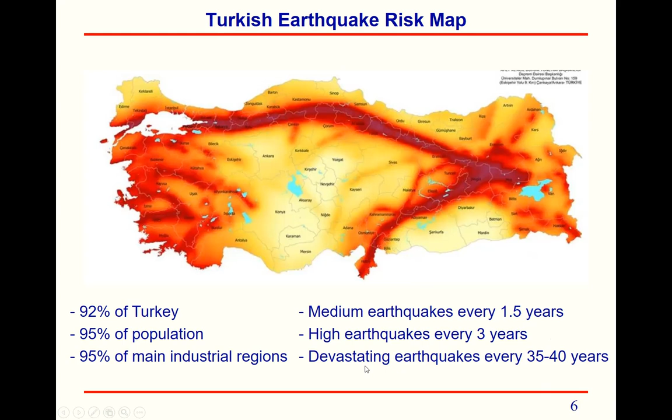Due to those fault lines, we have an earthquake risk map in Turkey. The darker colored locations are the more earthquake-affected regions, and the lighter, yellow colored locations are less affected. Actually, 92% of Turkey, 95% of our population, and 95% of our main industrial regions are in the earthquake affected zone. Every 1.5 years we have a medium earthquake, every 3 years a high earthquake, and every 35 to 40 years a devastating earthquake. This was a really devastating earthquake.

Let's talk about earthquake activity in the region. This region is very active, and we know the fault lines in the region. In that region, we've had historical earthquakes also, starting from the dawn of mankind - around 500, 600, 1343, 1114, 1544. We have many earthquakes, so this zone is really active in terms of earthquakes.

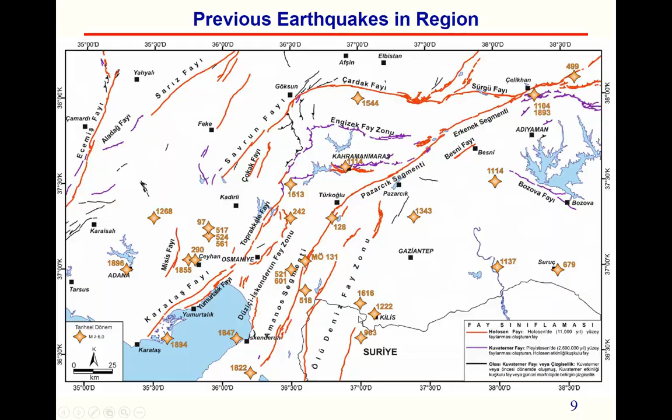Our earthquake, the last one which happened on 6th of February, was actually two earthquakes back to back. The first one happened here, which we call the Pazarcık earthquake, and the second happened here, which we call the Elbistan earthquake. The first one's moment magnitude was 7.7, and the second one's moment magnitude was 7.6. These are the cities adversely affected by the earthquake.

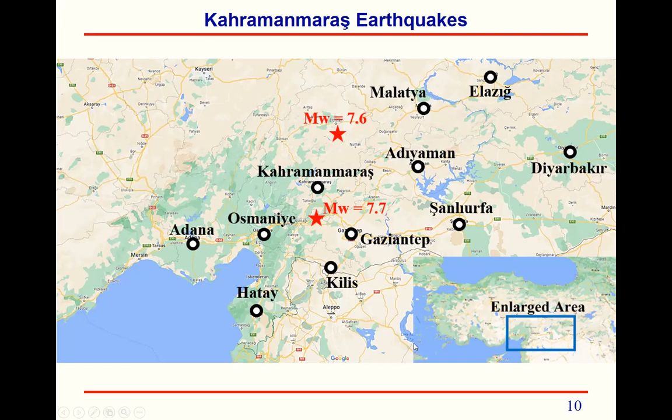In Turkey, there are two locations which calculate the magnitude of earthquakes. The first earthquake happened at 4:17 a.m., just before morning, with a magnitude close to 7.7. Other locations measured it a little higher, but we can call it 7.7, and it happened in the Pazarcık region in Kahramanmaraş. The second earthquake happened at 13:24 in the afternoon, the same day, with a magnitude of 7.6 - we call it the 7.6 Elbistan earthquake.

We had different focal depths measured by different locations, but the first earthquake's magnitude was 7.7, and the second earthquake's magnitude was 7.6, both happening the same day, very close to each other in time.

I will show you a video of the earthquake, what happened during it.

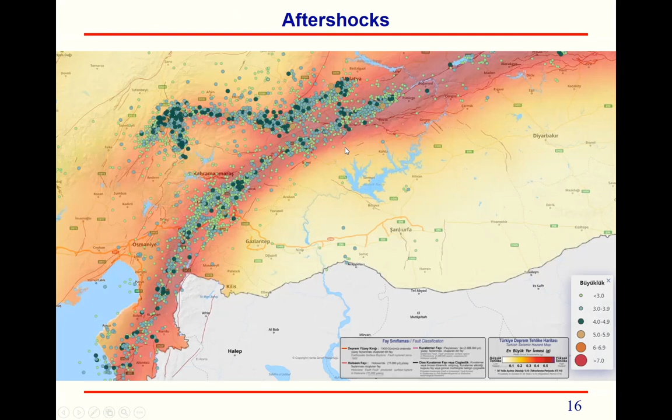After the earthquake, we had many aftershocks. You can see the locations of the aftershocks and their magnitudes. What are the magnitudes of them?

As I told you, the earthquakes happened at 4:17 and 13:24 in the afternoon, the same day, magnitude 7.7 and 7.6, and it affected these 11 cities: Adana, Osmaniye, Hatay, Kilis, Gaziantep, Şanlıurfa, Kahramanmaraş, Adıyaman, Diyarbakır, Elazığ, and Malatya.

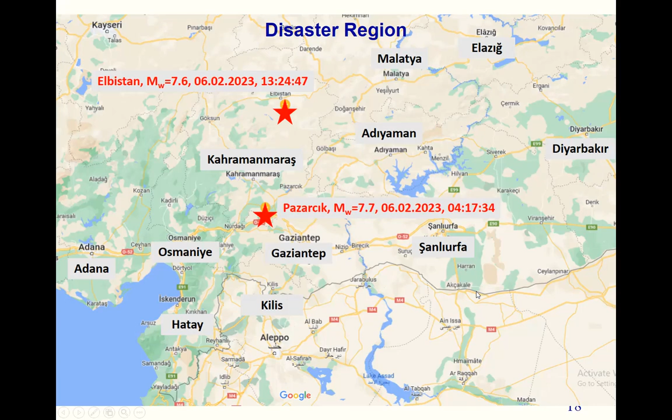We had collapses in these cities. To sum up how much collapse we had: in Hatay, 65,000 buildings were severely damaged or collapsed, so Hatay actually saw the highest devastation.

Then we had Kahramanmaraş, close to 49,000 buildings damaged. Malatya and Adıyaman were the other cities affected a lot: 31,000 buildings in Malatya and 28,000 buildings in Adıyaman.

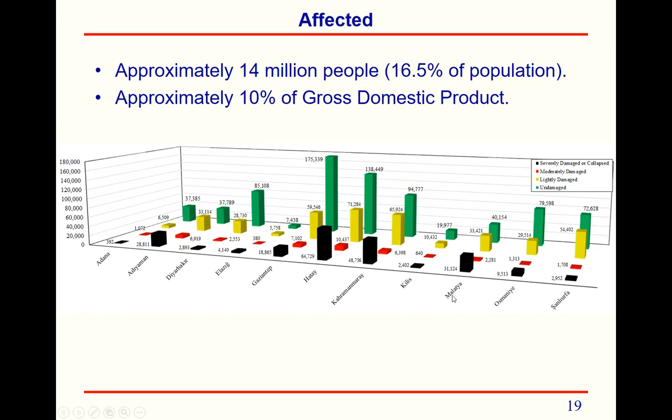But in the Malatya region, we didn't have a lot of life loss, because Malatya was affected more in the second earthquake, when the buildings were already deserted.

And I'm going to talk about our site investigation. After the first earthquake, which happened in the morning at 4:17, I'm living in Ankara, and we arranged a vehicle, and with that vehicle, we directly started going to the earthquake affected regions.

First, we went to Adana, and we were in the earthquake region 18 hours after the first earthquake. Then we stayed in this region for 5 days.

After 5 days, what we've seen: we went first to Adana, İskenderun, Antakya, then Kahramanmaraş, Pazarcık, where the first earthquake's epicenter is located, and then Adıyaman, Besni, Gaziantep, Nurdağı, Osmaniye. We saw many buildings in all of these locations.

We went there 18 hours after the earthquake, and stayed for 5 days. I'm going to show you the before and after the earthquake photos.

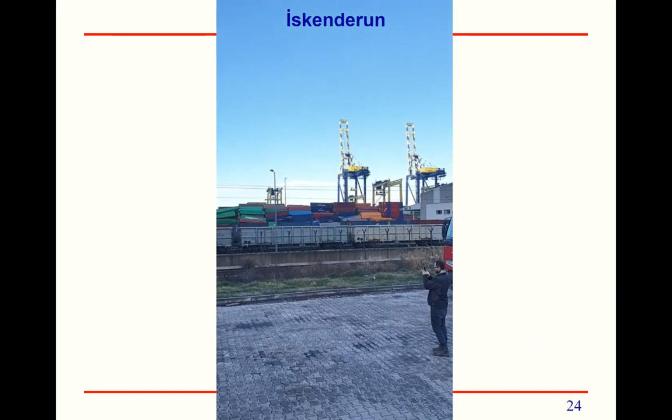Then we went to İskenderun after Adana, and in İskenderun the city center was actually in a very bad condition. Let me show that to you.

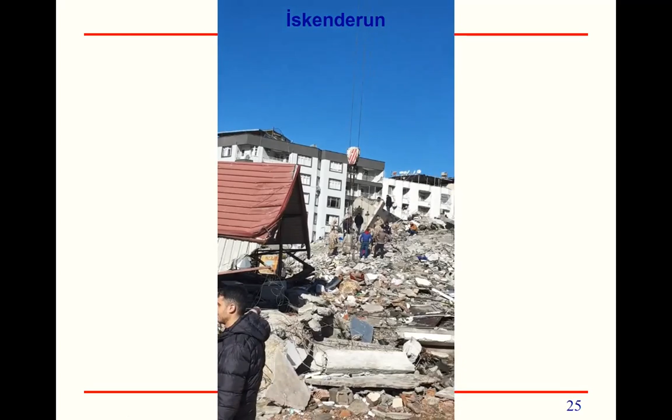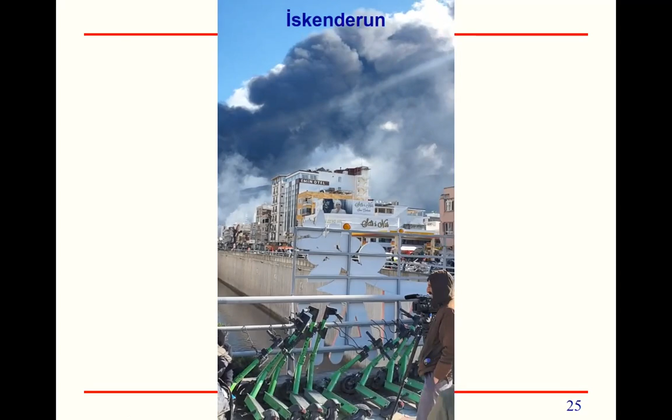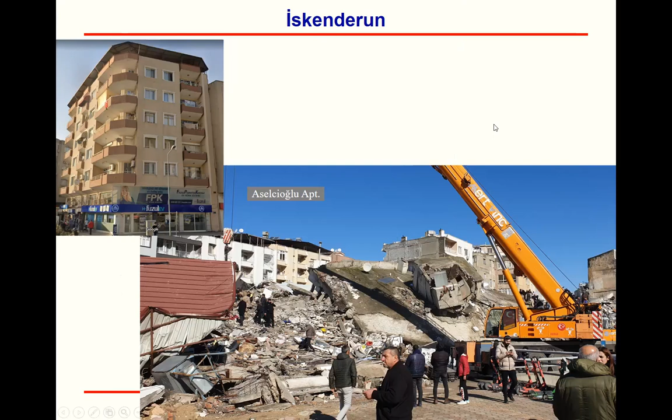After İskenderun, I can show some photos from İskenderun, before and after the earthquake. Aselcioğlu apartment, another apartment, before the earthquake and after the earthquake.

Then we went to Antakya. Antakya and İskenderun are both in Hatay city, and Hatay had the highest level of damage throughout all of these cities. It was really, really bad.

I can show you some before and after the earthquake photos. There was a very important structure I can call the Renaissance residence.

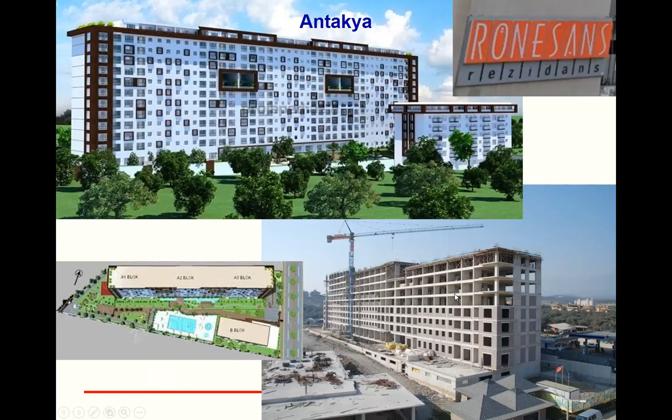In this Renaissance residence, we had 3 blocks constructed side by side, as you can see here, and there was another block, Block B, constructed a little far away from the first A1, A2, A3 blocks.

What happened is shown in the before-the-earthquake pictures and the after-the-earthquake pictures. It actually turned over towards the front side, towards Block B.

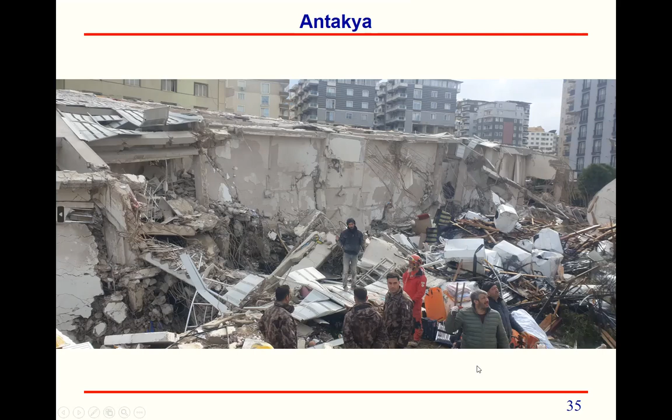We were here on the second day. There was a fire in the building, and you can see some pictures of these buildings - the Renaissance residence.

And then after Hatay, Antakya and Iskenderun, we went to Kahramanmaraş. On our way there, we saw a fault line which passed through the railroad and actually damaged the railroad like this.

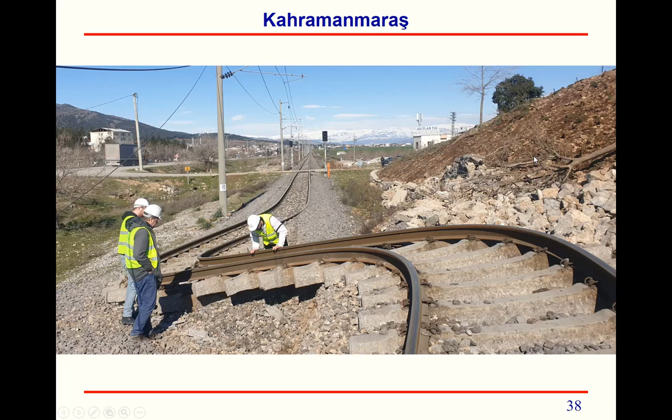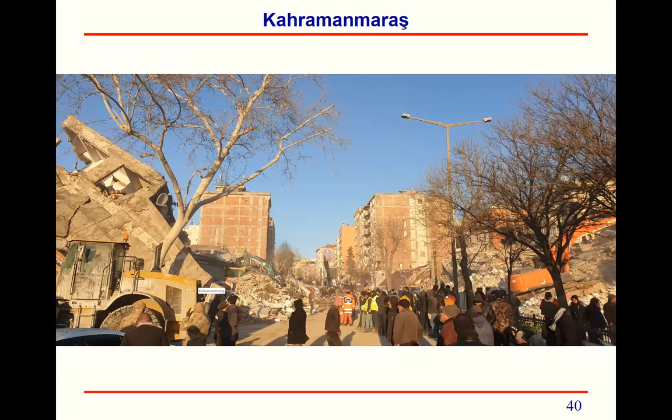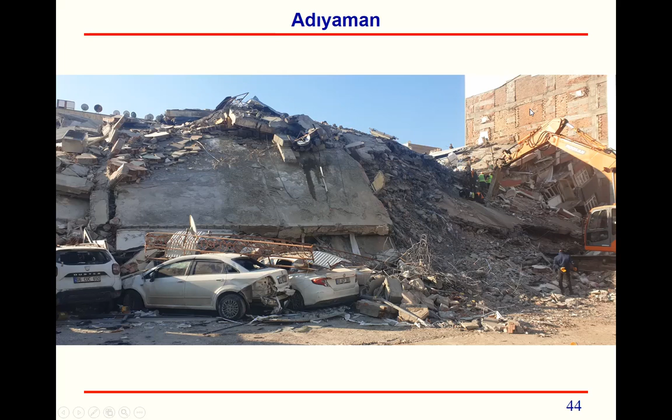And then we've been to Adıyaman. This is the Turkish Telecommunications Center in Adıyaman, this is after the earthquake. And here's another picture from Adıyaman.

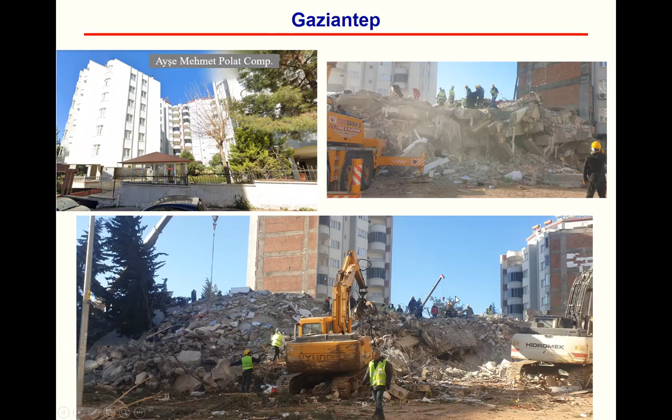And then we've been to Gaziantep. There wasn't a lot of damage there, but this building complex had 3 or 4 buildings collapse.

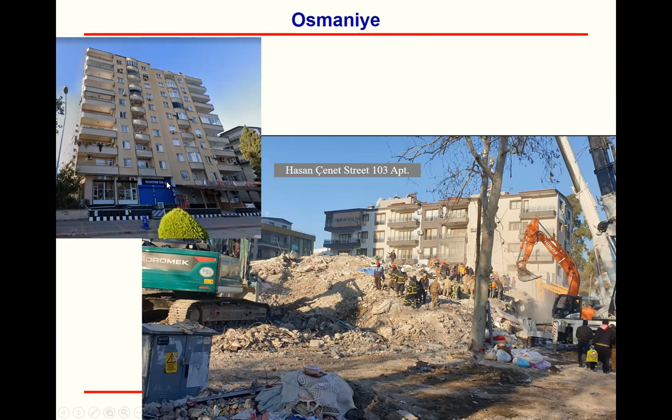And then we've been to Osmaniye. This was the last location that we've been to. It was before and after the earthquake, that's what we see. Right now you have seen some general view of the sites.

And then what I will explain is why all this happened, why there was that much damage. I'm going to explain this in light of Turkish earthquake specifications, okay?

The first earthquake specification in Turkey was published in 1940, and then we had many updates. But it's important to underline the last four: the 1975, 1998, 2007, and 2018 specifications. Why am I emphasizing the 1975 specification? Because more than 90% of the buildings that collapsed in this earthquake were constructed after 1975. You need to know 1975 because they should have been constructed based on this specification.

Our last Turkish earthquake specification, the 2018 Turkish building earthquake specification, aims for this: in a low intensity earthquake, we expect no damage if you design based on our specifications. In a medium intensity earthquake, there should be some damage, but it should be repairable. And in a high intensity earthquake, we need to prevent collapse. This is what we aim for in our specifications.

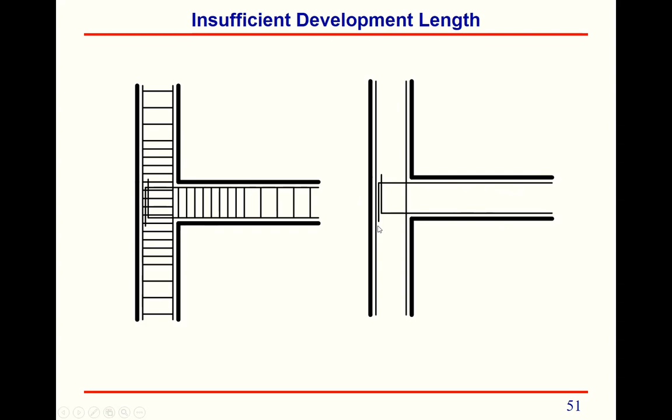If I take the stirrups out of view, I see this. Normally, the beam's longitudinal reinforcement, top and bottom reinforcement, shall be placed into the column and bent in the column so that it will not pull out from the column. This is what we have in our specification.

And if we satisfy this criteria, when the earthquake comes to the building and the building moves, there will be no separation between the columns and beams, because those joints will actually move together.

But there's a wrong application of this, where the top and bottom reinforcement of the beams are actually not bent in the column. They just extend into the column a little and then stop. This is the wrong application.

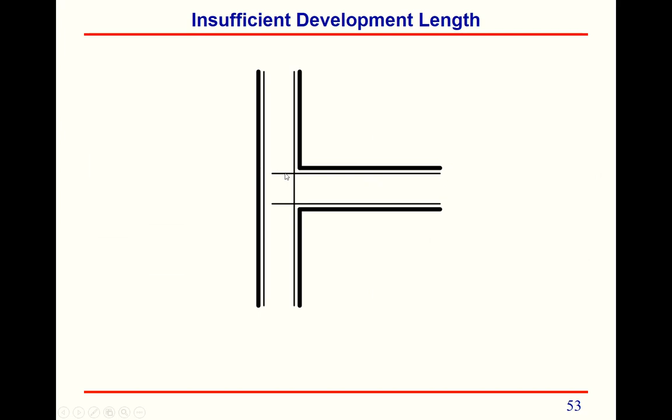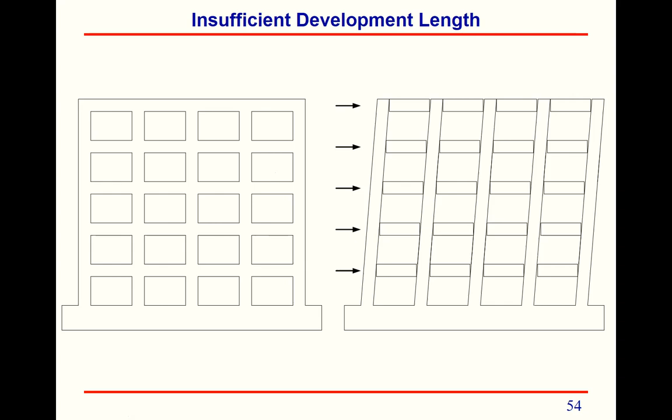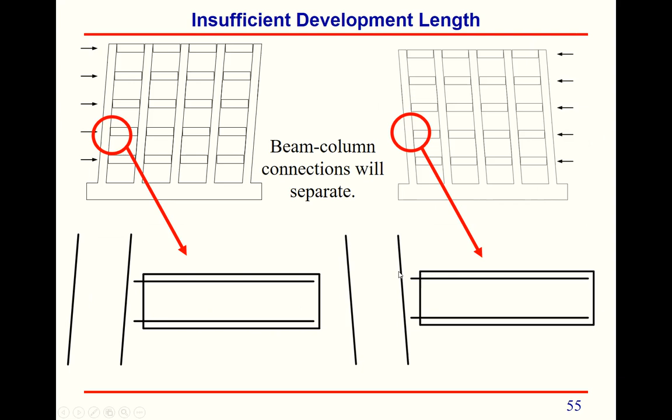And if we have this wrong application, what happens is that when the earthquake load comes to your building, the beams and columns will get separated like this. When it comes from here, the bottom side will get separated. When it comes from the right-hand side, the top side will get separated, and the integrity will be lost.

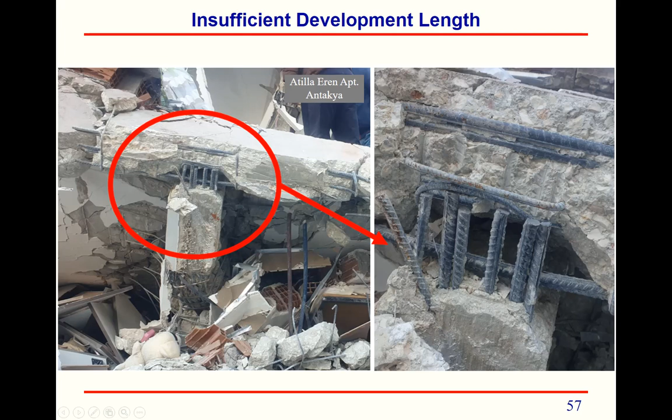Also, another one, this is the same apartment. Also, the bottom reinforcement just ends. There is no bending of longitudinal bars at the joints. This is a very big problem because when the earthquake comes, the integrity will be lost.

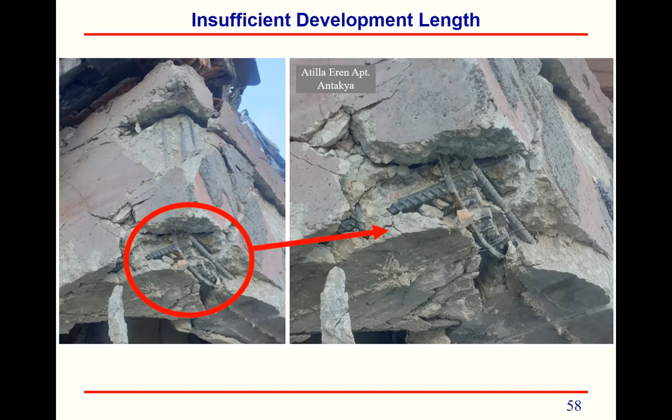You may not be able to talk about any other stuff, not about concrete quality, not about steel strength, not about anything else. So that when the earthquake comes, it will fail immediately.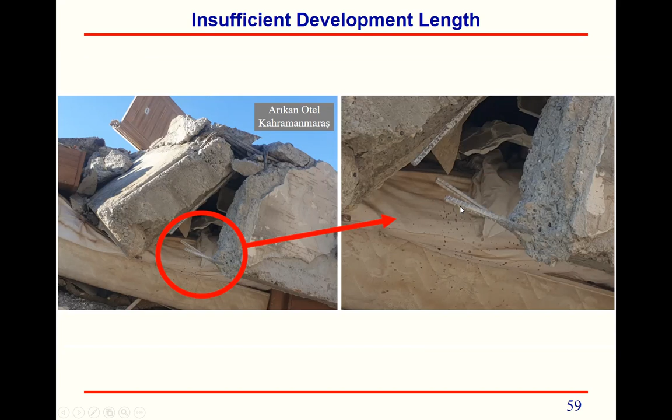And another picture from Kahramanmaraş. Look, you can see that they're not bent, they're a little extended and then stop. Also here it's the same, so they get separated. We lose the integrity of the structural element.

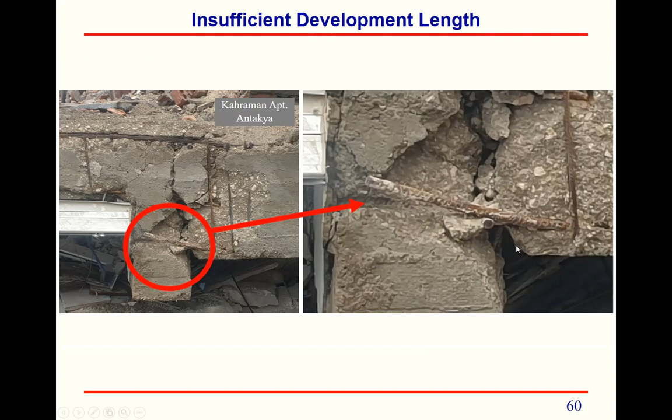When you cast concrete, it will look like this, up to half of it. When you bend the ends 135 degrees, it means you are actually anchoring the ends of the transverse reinforcement, the stirrups, in the core concrete, not in the cover concrete.

When loads are applied in this column, the cover concrete, which surrounds the transverse reinforcement, the stirrups, will be lost. It will be gone when they're under load. However, the concrete inside also wants to expand. At that time, transverse reinforcements keep it in place since the ends are anchored to the core concrete.

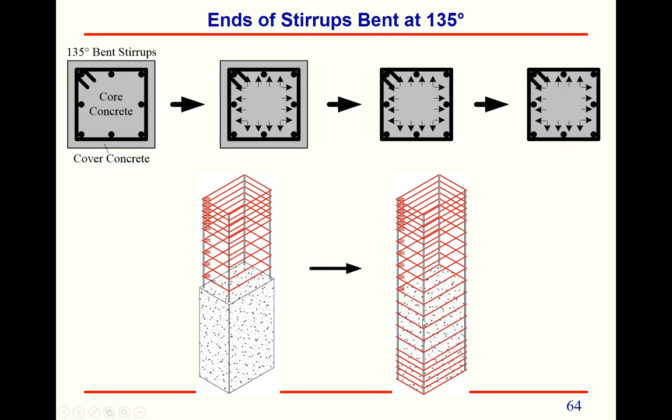So what happens is you lose the cover concrete, but when you bend the ends of the transverse reinforcement towards the core concrete, you will not lose the core concrete, the concrete in the core area. And there's a wrong application of this transverse reinforcement.

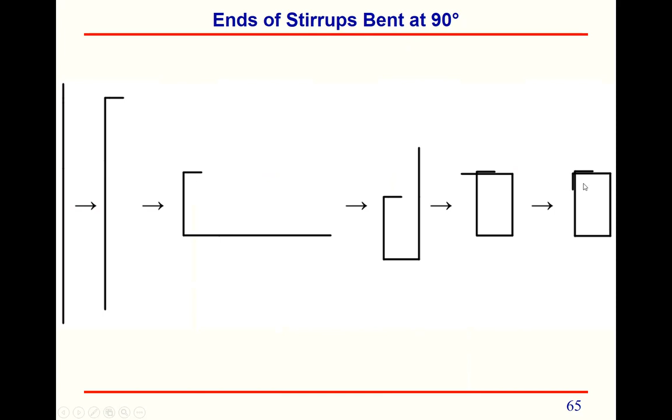Instead of bending this end into the core concrete, you bend it 90 degrees. We call it a 90 degree bend. When you bend it 90 degrees, the ends of the transverse reinforcement end up bent like this, and when you prepare the reinforcement cage, the ends are 90 degrees bent.

However, when the load is applied on this column, or it can be a beam too, it doesn't matter, the cover concrete is lost because there is nothing holding it. The core concrete is actually held by the transverse reinforcement, but the ends of the transverse reinforcement, when the concrete wants to expand, open up like this. And they become useless.

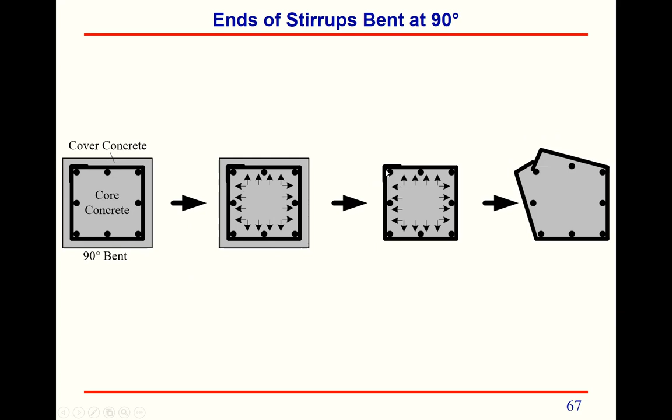If you are using this type of transverse reinforcement, it's better not to use them at all. They have the same effectiveness as having no transverse reinforcement.

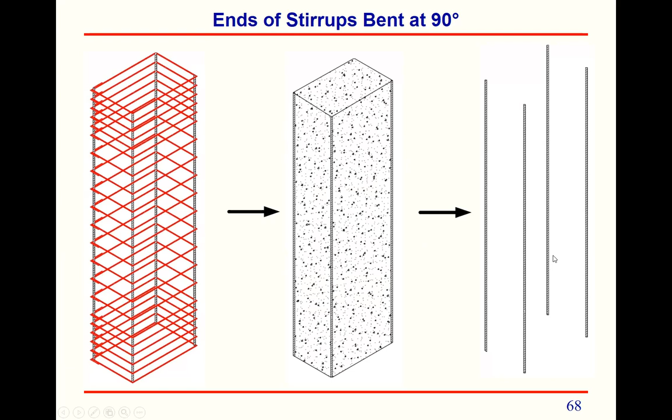This is what happens in an earthquake. Initially, you have the 90 degree bent bars, the stirrups, and then the stirrups are lost because they open up. You will have only the longitudinal reinforcement and core concrete. Then, since nothing is holding it, you will also lose the core concrete, and then everything.

The transverse reinforcement acts as a second duty, let me call it. Its aim is to resist the shear forces, and we also call it the shear reinforcement, transverse reinforcement. When the earthquake load comes, each column resists shear forces by itself.

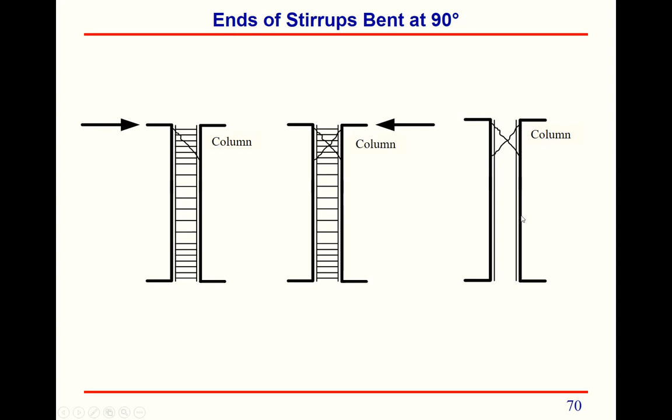If you have 90 degree transverse reinforcement, when the earthquake load comes like this, there will be a crack like this, and from the other side, another crack like this. However, since the transverse reinforcement opens up, it means you're not using any steel reinforcement to resist these forces, so your column will also fail due to the 90 degree bent stirrups.

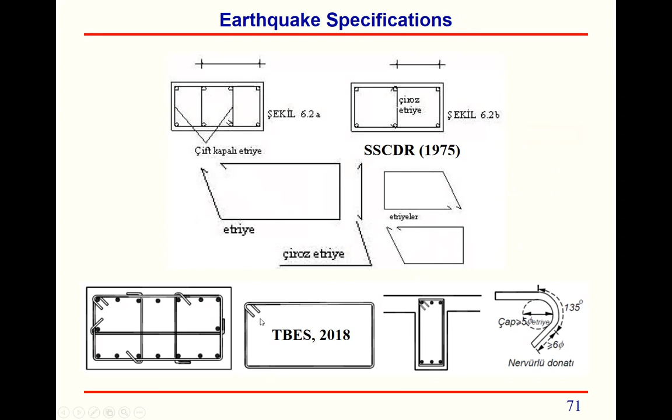This was known in 1975, by the way, in our Turkish standard from 1975. We don't have a very good drawing, but you can see the ends shall be bent like this. In 2018, we have better drawings explaining the 135 degree bend, and for both beams and columns, you can see how you need to do them.

We've been to many cities and seen many collapsed buildings, and in none of them have we seen both ends of the stirrups bent 135 degrees. In all of them, we have seen both legs were 90 degrees.

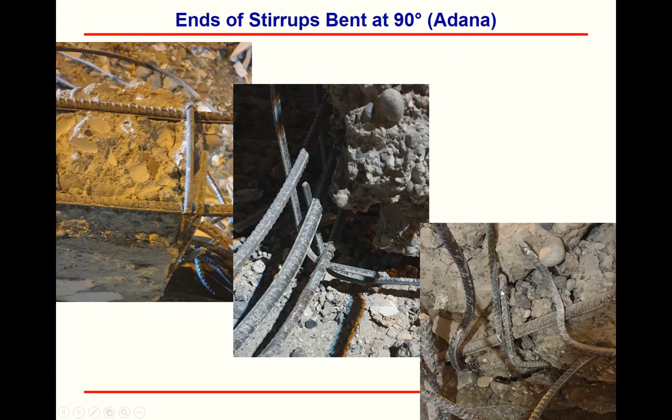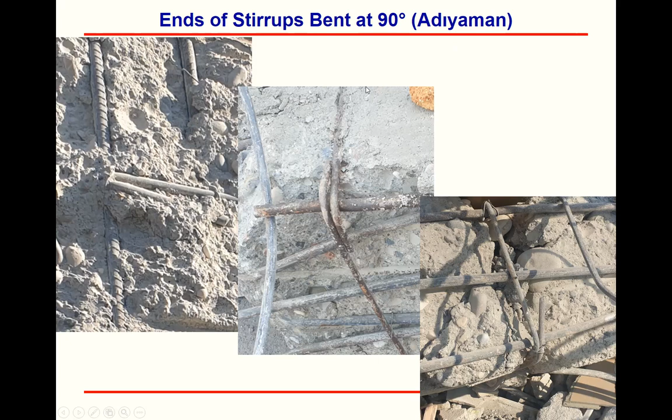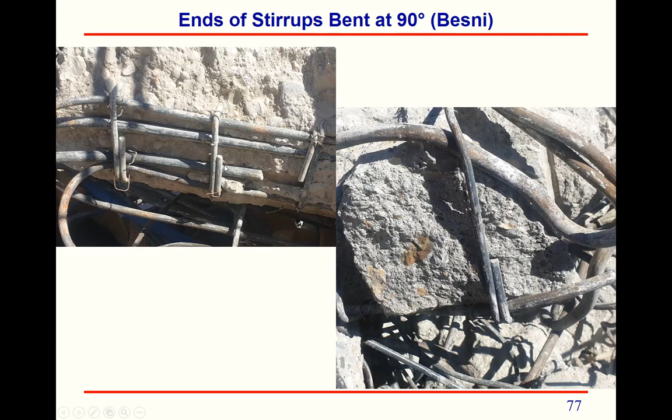The transverse reinforcements were all 90 degrees. This is also in Adıyaman, 90 degrees, 90 degrees, 90 degrees, 90 degrees. All of them were 90 degrees. This is from Gaziantep, 90 degrees, 90 degrees, as you can see.

None of them had both ends bent 135 degrees, but in Nurdağı, in only one collapsed building, in one location, we saw that one end was bent 135 degrees, but the other end was still 90 degrees. Actually, bending only one end is not important, the other end will open up, and it will open up all the way.

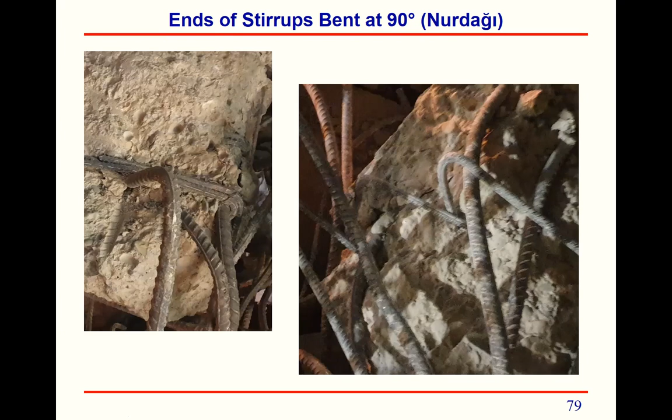This one is from Osmaniye, 90 degrees and 90 degrees, and you can see how it opened up.

Okay, and we have seen some constructions that are in progress in the earthquake regions, in Kahramanmaraş. In this region, many of the buildings collapsed in that street, and we have seen there was a new building constructed where one end had a 135 degree stirrup bend, and the other end was 90 degrees. It was a little bit longer, but it was still 90 degrees.

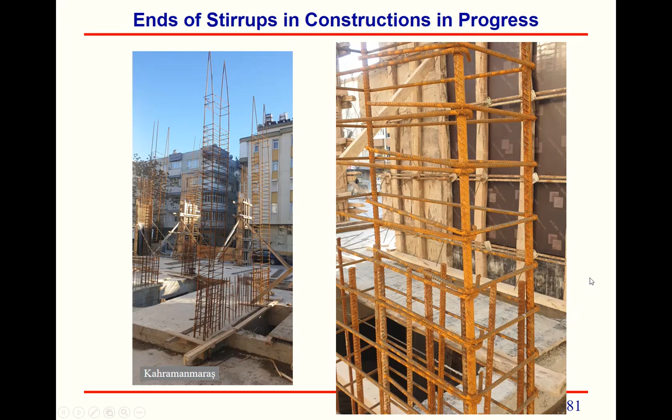I think they're still not constructing the way it should be. However, it's not the same in all the construction locations. This is from Osmaniye, where you can see there were bends at 135 degrees. And in Adıyaman, you can see that the transverse reinforcement also bent, 135 degrees, in this part of the construction. In some of them, they are still not doing it.

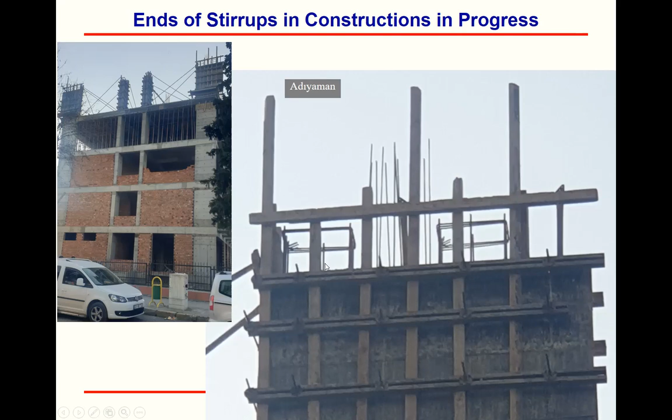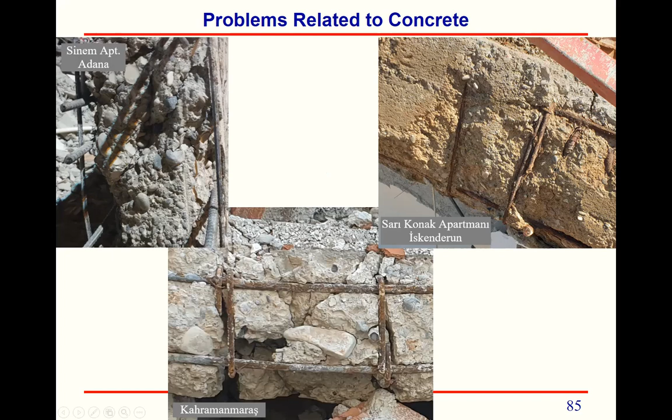Let's talk about some concrete and steel problems. The concrete was not high quality in the collapsed buildings. They have rounded aggregates, and in some of them we don't see coarse aggregates. The color of the concrete was really weird, and they used some large aggregates - I cannot even call them aggregates, like 10 to 15 centimeters. And not only the size of the aggregates affects the concrete quality, also some materials that shouldn't be used, like wooden pieces or garbage, were in the concrete.

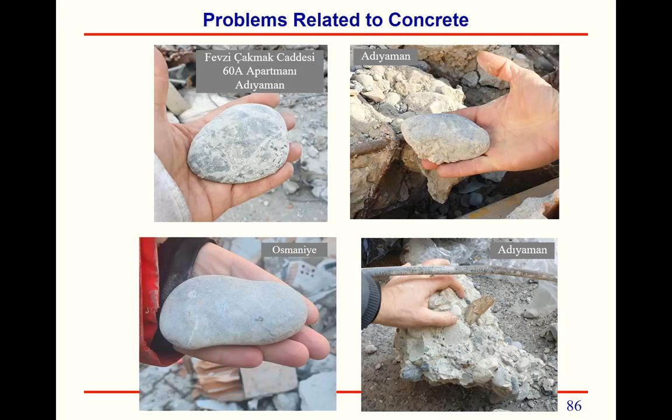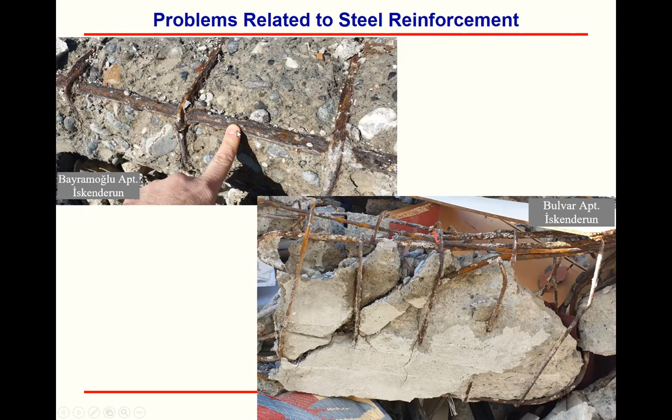And with steel, yes, we had problems too, corrosion problems. You can see the effective area was reduced to half of the original area in here. You can see the corrosion.

Also, the placement of the reinforcement was not correct in some of the buildings, where concrete cannot pass through, and enough bonding cannot be provided with this mislocated reinforcement. Confinement regions are another problem.

Actually, in the 1975 specification, we had this: the ends shall be confined with stirrups, with more closely spaced stirrups. Not only ends of the beams, also the column ends shall be confined with stirrups. This is from the 1975 specification.

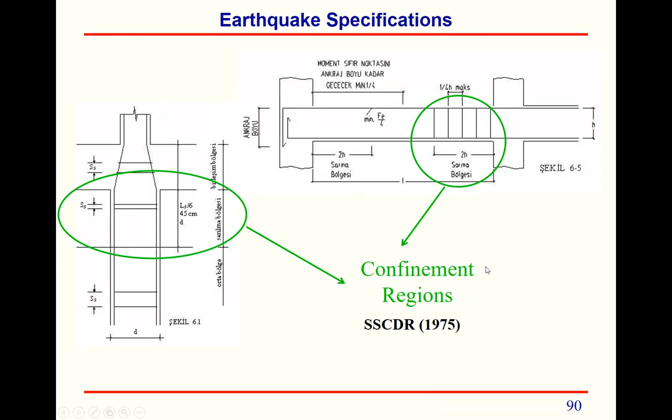And our latest specification, 2018, has better drawings, as you can imagine. The ends of the beams and ends of the columns shall have more closely spaced stirrups, which will create confinement regions at the ends of the beams and at the ends of the columns. Why? Because we know that those locations will be affected more - the more load effects will happen at the ends of the columns and beams.

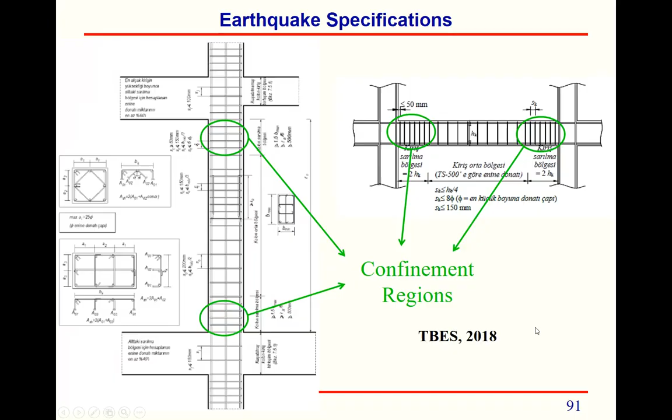This was known, but in most of the collapsed buildings, we have seen that there are no confinement regions on the columns, at the ends of the columns, and at the end of the beam. Not all of them - we have seen in some of them we have it.

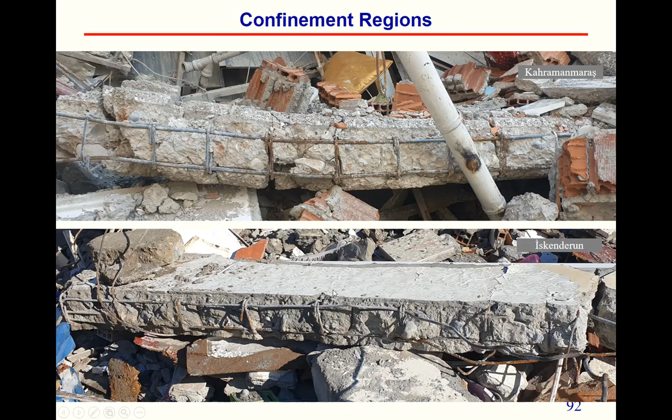And from Antakya, Kahramanmaraş, other examples of these buildings. And the strong beam, stronger column condition - actually this is the philosophy under our earthquake code.

What happens is that we know that high energy dissipation is the aim in our specification. How do we do that? We do this by locating the damages in the structural system.

What we do is we construct the beams strong, but the columns stronger. Therefore, when there's a connection joint, at that joint the beams will fail since they are weaker than the columns, but the columns will not fail. And when you satisfy this criteria, the plastic hinges will happen at the end of the beams, not at the end of the columns. Then for this beam to fail, all the ends of the beams shall have damage, and then this building will fail, but it will absorb a lot of energy.

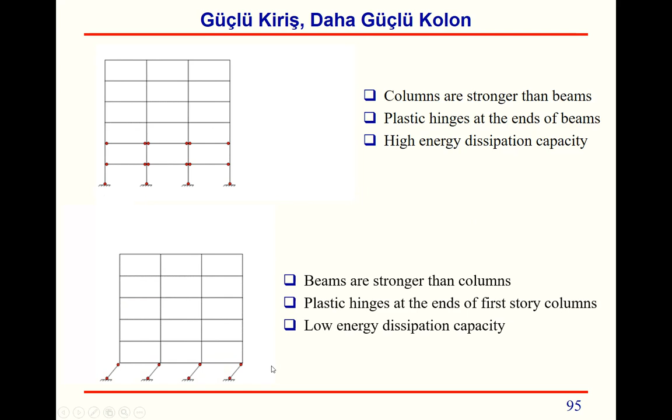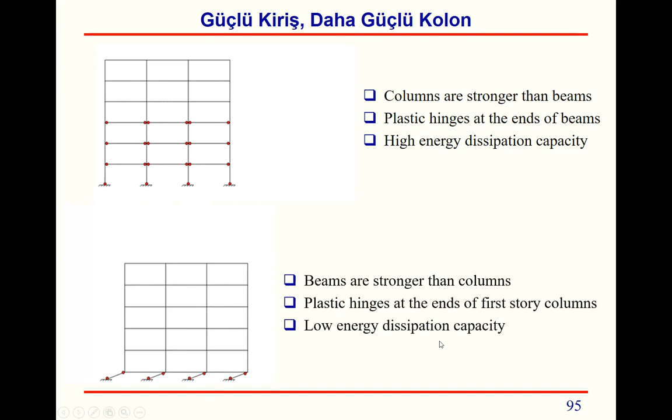However, if you do the opposite, if you make the beams stronger than the columns, the beams will not get any damage, the columns will get damage. And after getting the damage or plastic hinging in the first story columns, which is a critical location, the building will fail, and it will fail without any dissipation, not a little dissipation of energy - it will fail.

Actually, to satisfy this criteria, our earthquake code tells you this: the resisting moment capacity of the columns shall be 20% greater than the resisting moment capacity of the beams. This is how we satisfy this criteria.

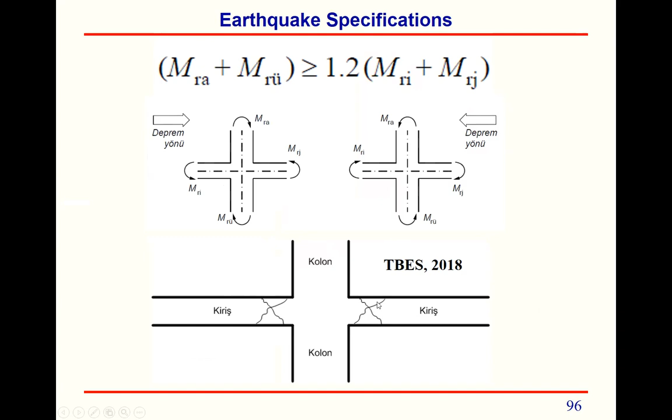Look, this column - by the way, the plastic hinging at the bottom of the column is unavoidable, so there will be some plastic hinging at the bottom of the column. But after that, we don't want any damage to happen on the column. And if this happens, the building, even though it will get damaged, will not collapse.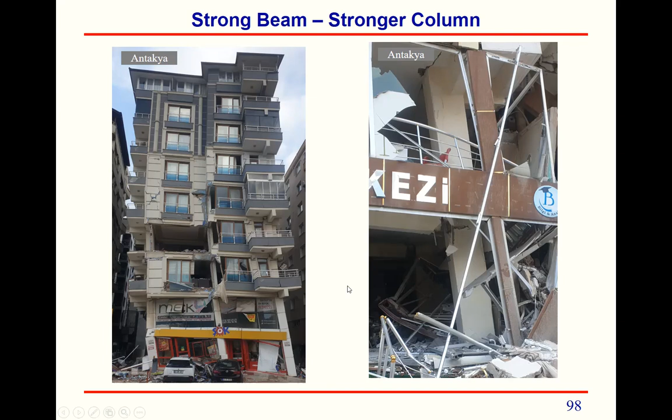And if you do the opposite, where the columns are weaker than the beams, the columns will fail, and your first story columns will fail, and then your building will actually sit on the ground with the second story right here. Another example of that.

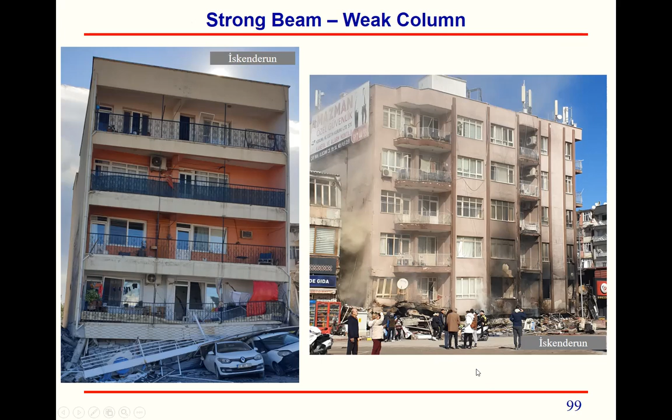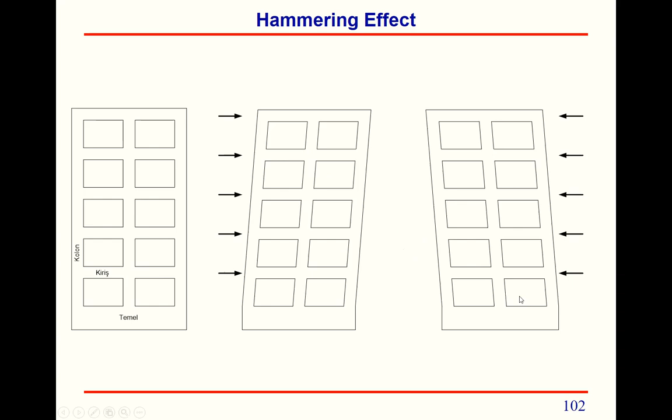And another problem - actually these are the basic problems, there are many problems in the collapsed buildings. These are some basic problems, and this is actually a more advanced problem I can call the hammering effect. What happens is that when you construct two buildings side by side, they will move in a different way in the earthquake.

Let me show a picture of a model, or a video of a model. Your building will move like this. And if you are constructing two buildings side by side, you need to give some space in between.

In our earthquake specification, we knew it in 1975 - these are in Turkish, but I'm going to translate it for you. Up to 6 meters, you need to leave 3 centimeters in between two adjacent buildings. And at each 3 meters after 6 meters, you need to place 1 centimeter joint - we call it a derz, you can call it a joint - space in between the two.

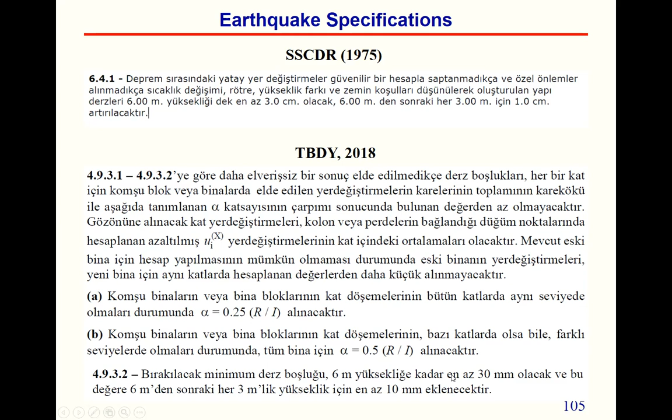We knew this in 1975, and in our 2018 specification, we have the same criteria. If you don't satisfy this criteria, what happens is that the buildings will actually hit each other. Let me show a video of that.

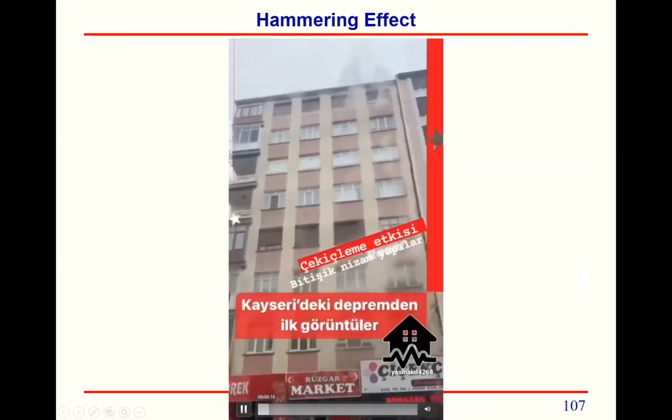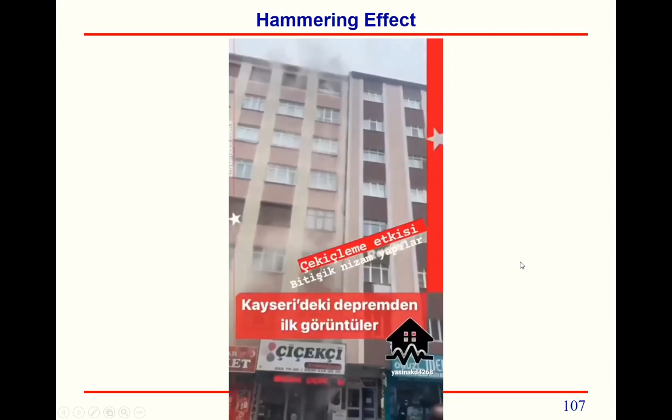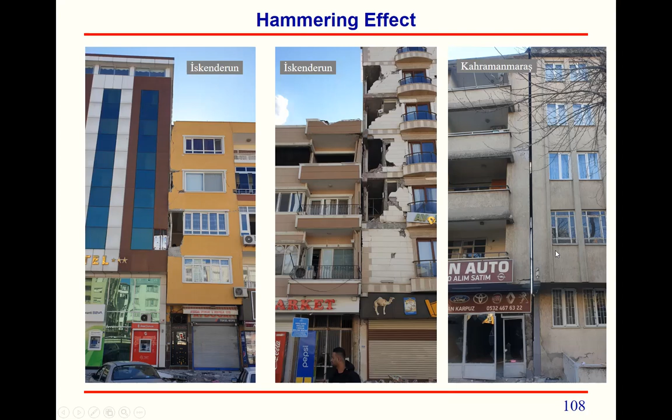This is also a very bad thing to happen, because we don't calculate these forces. We calculate the other forces, but not a building hitting your building. Therefore, there should always be some space placed, which is a joint, because of the expansion joint, and we had some damages due to this hammering effect. At the end, we have some space in between, naturally located space.

Okay, another issue is the inspection issue. Actually, the inspection of the construction works was not mandatory up to 2001. Then in 2001, after our Izmit earthquake in 1999, it became mandatory.

First in some cities, and then all throughout Turkey. The first 3 cities - Adana, Gaziantep, Hatay - the inspection of construction works was mandatory after 2001. And the other cities that were affected in this earthquake - Adıyaman, Diyarbakır, Elazığ, Maraş, Kahramanmaraş, Kilis, Malatya, Osmaniye, and Şanlıurfa - the mandatory inspection was effective after 2011.

However, there were still problems with that, and in 2019 they tried to fix this problem by introducing a new law. After that new law, the ministry will determine randomly which inspection company will be assigned to the construction, because previously you had the chance to select the company and pay that company. If that company does whatever it does, if you don't like it, you can change to another company and then pay the other company.

But there were some inconsistencies, and they actually fixed it in 2019, after 2019.

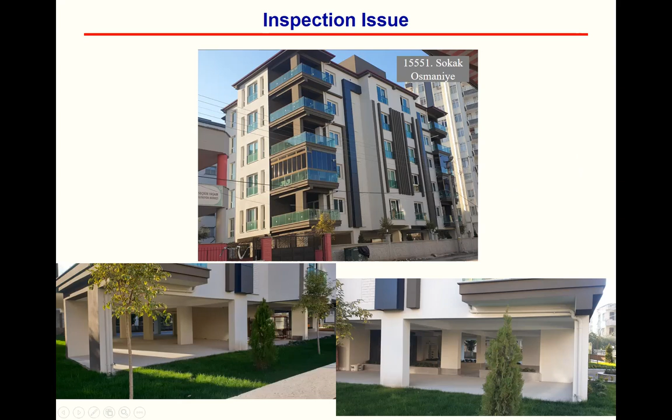So another building in Osmaniye also didn't have - it had hairline cracks, that we call hairline cracks - it didn't have moderate or heavy damage. So if you construct based on the specifications, they are actually standing still without having any important damages. Okay.

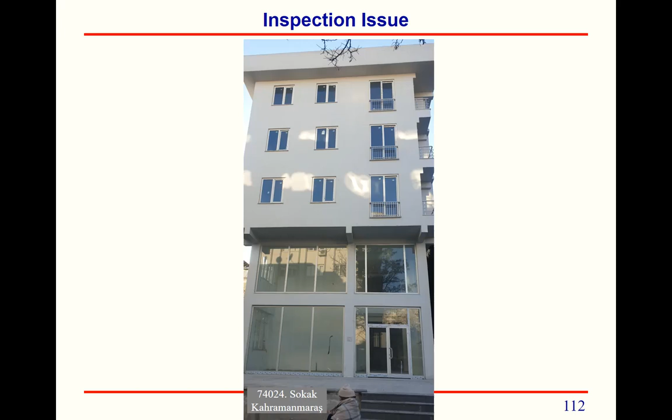And as a result, we come to the end. As a result, the problems are many, and as a conclusion, existing buildings do not comply with the specifications valid in that construction period, even 1975. They're not obeying the rules from 1975.

And maybe mistakes were made during construction. However, this is important - you need to at least follow the specifications. And problems related to building inspection - as you can see, nobody obeyed the specifications for the collapsed buildings and deficient buildings. The more important thing is this earthquake happened in that region with 11 cities.

But if this happened in another location in Turkey, we will see the same consequences, same reasons, same conclusions, meaning there will be many losses. Therefore, throughout Turkey, we need to either strengthen the deficient buildings that are not complying with the standards, or demolish them based on economic considerations.